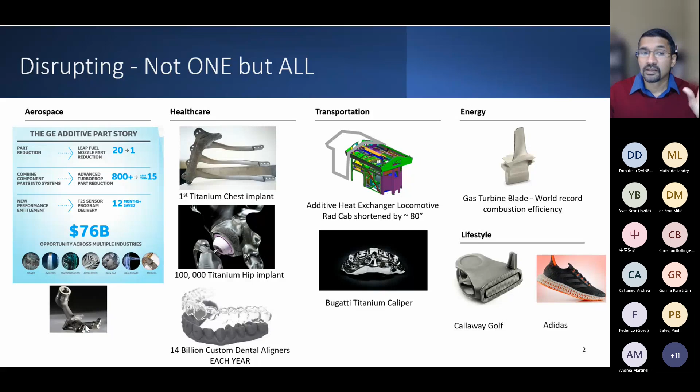The poster child when I was part of GE was the fuel nozzle, truly where it was a consolidation. This is in the hot section of the aircraft turbine, which disperses the fuel into the turbine, right? A 20 to 1 part consolidation that you can see, right? Single alloy manufactured using additive manufacturing.

The key part, as we think about penetration across multiple sectors: as we went through COVID, one of the key things we all heard about from our supply chain leaders was the challenges with supply chain resiliency. With that tailwind, where we were trying to see whether we can source products where we need to be, there's a clear conversation on a higher level about what onshoring means. And with those tailwinds, we'd expect more additive manufacturing to take place, because it has the capability to do in situ manufacturing, which is at point of use, whether it be in the dental segments that I highlighted.

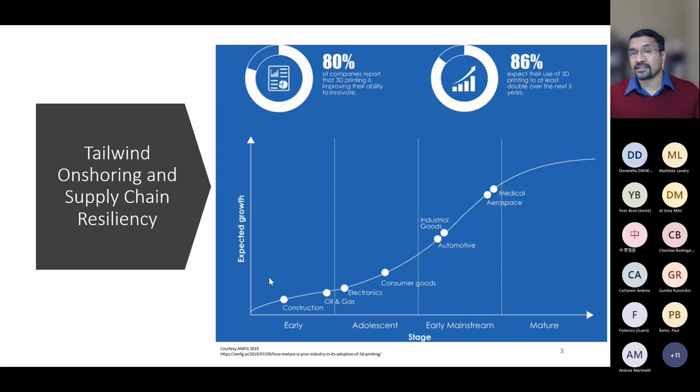With this, you'd expect more than an 86% doubling over the next 5 years, which is quite exciting to see and gives us as EHS professionals and OH professionals the ability to anticipate in the segment that you are in and to understand what the implications of this technology mean.

An aerospace example would be the clean sheet design of the Catalyst aircraft engine. A third of that entire engine was built with additively manufactured parts that were not the same as before, but were entirely designed for additive application.

If you look at Deloitte, they talk about the number of steps that go in when we think about sustainability, right? You're talking about not only your scope 1 and scope 2, but scope 3 being the largest part, where you're sourcing your materials from multiple suppliers. Additive has inherent capabilities for shrinking the supply chain, requiring fewer assembly steps, and, when you think about transport density, rather than the part needing to move, just the digital file needs to be sent to the right place and you can execute your job, right? So from a turnaround time standpoint, you have phenomenal capabilities with this technology.

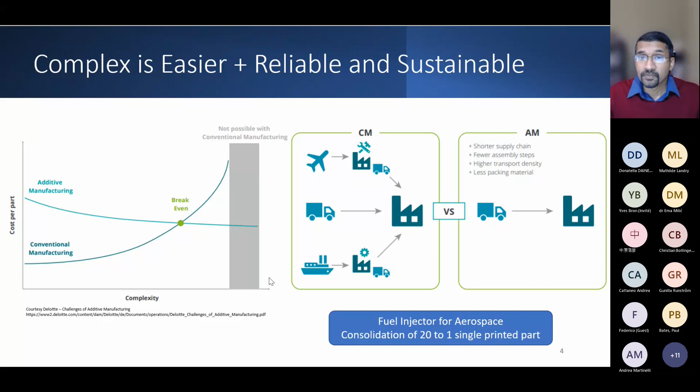So jumping in, just to kind of expand now, these numbers are notional in nature. When I first created this as part of the additive business unit, and I see the codec is not working. Let me see if I can go back.

Now, energy could be in multiple forms, whether it be an electron beam, laser, photocuring UV light, and it ends up creating the part in 3 dimensions as the plate lowers. So primarily, you're not subtracting, taking away a block of material using a lathe or a CNC machine and converting it into a part. You're just focusedly building the part.

And there are a couple of key material spaces that we'll highlight and touch upon today. One, when I think about mature technologies, metals primarily are being industrialized. In polymer, there's definitely quite a few custom manufacturing solutions. Take it from your iPhone case to a lockout device that we had seen built out specifically that we couldn't produce outside or procure, to polymers that are now more and more being used in things like washers, dryers, components that can enable your inventory to be significantly low.

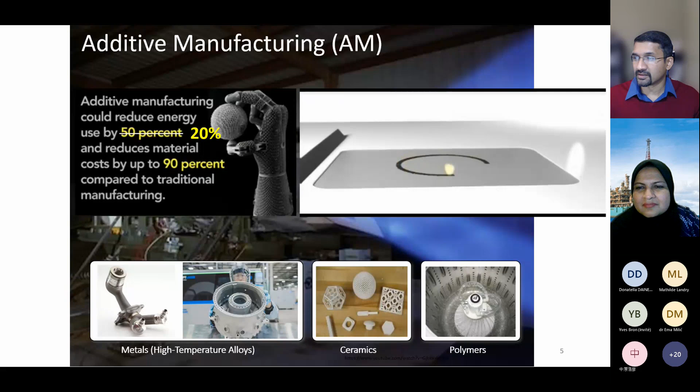Hey, Paul, Michael, glad to see you guys join.

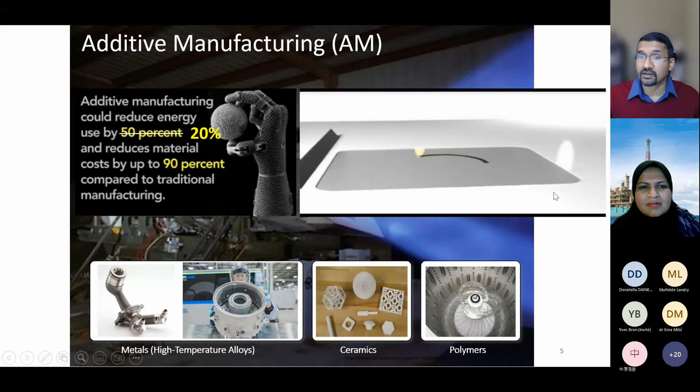All right, so we are seeing more of a theme for both. So I'll probably pick up my pace. That way we can get through the conversation, and feel free to raise your hand so we can answer any questions. So I'll jump in with metals, right? From an industrial manufacturing standpoint, the risk landscape is more diverse. So with any technology, there's quite a few acronyms.

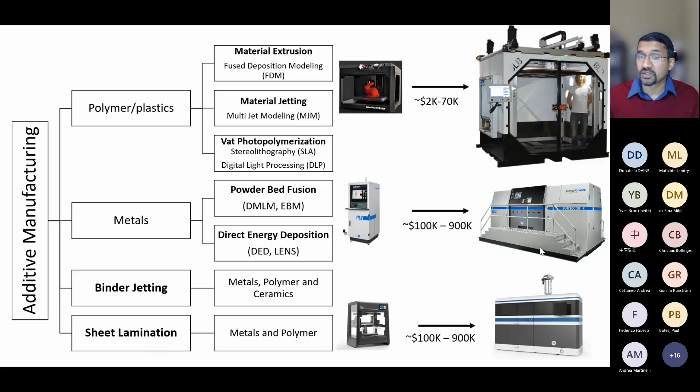And price points: when I think about literature, quite a bit of it has been focused on polymer, primarily because of the low cost of capital that's needed. But there's more work being done, specifically coming out of Sweden and Italy, that's quite exciting to see, focused on occupational health and hygiene issues when it comes to metal additive manufacturing.

Just to anchor our conversation, when we think about EHS risk management, this is one technology where it's important for us to think about not just the process, which we tend to focus on, but also the materials. Both of those two elements actually have a significant implication when it comes to deployment of metal additive manufacturing, as it impacts the infrastructure need, right?

So this is the building that you house it in, whether it be a brownfield or a greenfield site that you're trying to build up to bring this technology in. In small scale, you can get away with it, but if it's going to be industrialized, that is full scale production, or even low rate production, that warrants you to have that anticipation of risk and have the right conversation with your stakeholders up front.

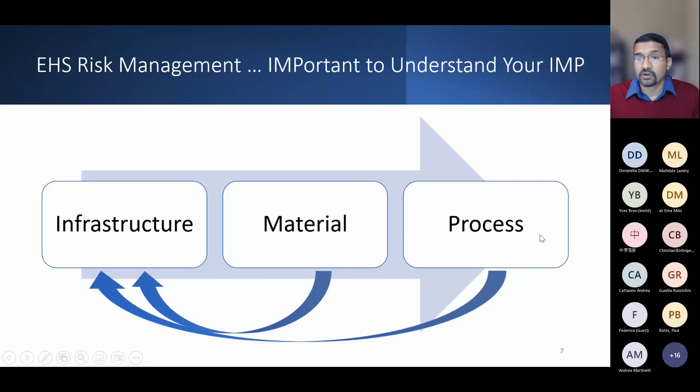So IMP, right? So important to know your IMP, which is infrastructure, material, and process. So we'll start with process and work our way backwards to what those implications mean when it comes to infrastructure needs. And we'll cover the controls for each technology space. So getting into metals, the most ubiquitous or commonly used technology when it comes to metal additive manufacturing is direct metal laser sintering and electron beam.

Effectively, in this case, as you saw on the prior slide, a platen, which is effectively a build plate where you apply powder layer by layer, and use of either a laser or an electron beam that supplies energy and then effectively sinters the metal powder in place. Now, this allows the part formation in 3 dimensions. The plate lowers, and you will have the part creation actually happening within, enclosed with the powder around it.

The difference between the two technologies, between DMLM and EBM: DMLM is actually done with inert gas. So I would ask you to think about it effectively like doing welding, right? Layer by layer, if you have ever welded, put a bead on, but you are doing that in an inert environment. So there are fume emissions that come out. The inert gas is actually recirculated to make sure you're capturing and reusing that from a utility perspective.

And if you think about the fire triangle, right? So you have metal powder, which depending on the size fraction can be combustible. The fuel aspect of it, oxygen, and the energy source, right? The control here from a risk standpoint is actually ensuring your oxygen is completely devoid, right? So it's absent in the environment the work is actually happening in, because the energy is coming from either laser or EBM. So the risk mitigation, primarily by inerting, is an approach that makes this technology safe from an execution perspective.

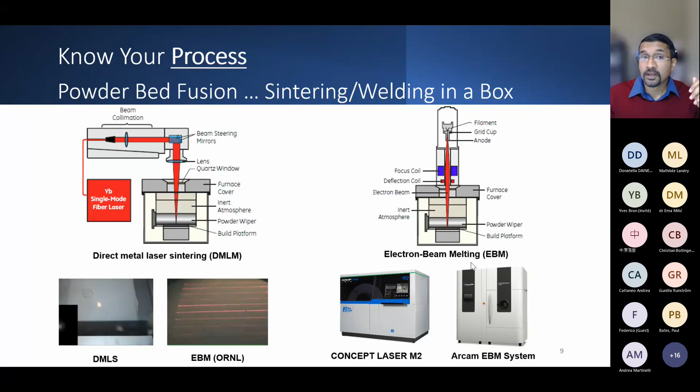You're thinking about companies like SLM, GE Additive, Desktop Metal. Well, Desktop is in the binder jetting space, that are actually bringing this technology into the marketplace at this point in time. Let's talk about binder jetting. One of the benefits and the trade-offs when it comes to powder bed fusion versus binder jetting.

In this case, binder jetting, I'd like you to think about it more like effectively baking a cake, right? So here you do have screen printing technology being used, where the powder bed is supplied and sprayed with fine nozzles, a polymeric or organic or water-based binder that's sprayed in the pattern of the part you want to create. As the head rolls over, it glues and creates a green part, which is then subsequently cured in the return step using curing light.

The subsequent motion of this, the build plate descends, and the green part is bonded as the platen comes down. If you can imagine something that you're making like a sandcastle, it is very fragile in nature.

The couple of key steps that are required to sinter it and make it into a fully densified part is you bring it subsequently to a curing and a sintering furnace, curing to drive off the organic binders or water-based binders that you're using, and then final densification is usually with sintering, right? So you have more than one set of process steps that need to happen.

Last but not least, depending on the porosity, if you need a densified part, infiltration, which is using materials to actually seal micro openings. Those are very common examples of what you would see in binder jet. I briefly talked about the benefits and the trade-offs earlier. Binder jet is one technology in metal additive manufacturing that is capable of high volume production. Think automotive application spaces where you can create the same part reliably with the specs that you want. And this technology is maturing quickly and has the ability to scale to full-scale deployment.

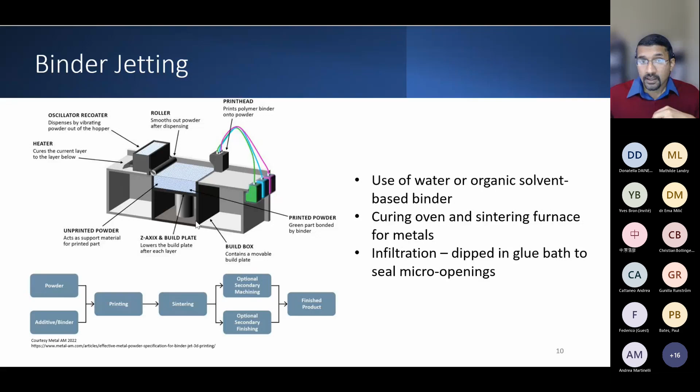The last but not least, directed energy deposition. If I simply put it, it's welding in an even larger box, right? So you have a version where you're working with metal powders, which are pushed through a jet with actuated nozzles, or it could be a wire, primarily in repair application spaces where you may have a high temperature component and you want to do field repairs. There are some pretty cool applications of creating larger aerospace parts, specifically in applications like SpaceX is thinking about. But feedstock material varies.

Just from a design perspective, you can see the operator is out of the weld pool envelope, right? As you see in the size and scale, these are massive systems, capable of achieving deposition rates significantly higher than binder jet or, for that matter, powder bed fusion systems. Those are a few elements that make this more suitable primarily for large part and repair applications. I'll take a pause.

Maybe I'll open the floor for the team if folks have any questions on the technology itself before we jump into specific elements. Does anybody have any questions? You can unmute yourself and ask a question to Srinivas.

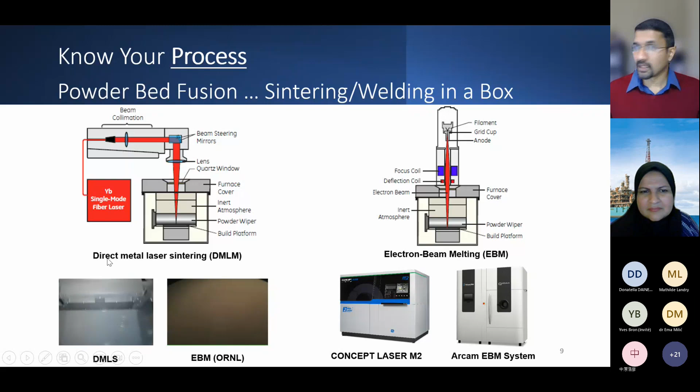High temperature metal alloys using DMLM, right? Yeah. So if you're thinking aerospace parts, in some cases you'd see low volume production being made with DMLM, like the Bugatti caliper that we talked about. And then high volume production is primarily through binder jet, which is now being matured as a technology. Also for the medical industry? Medical, no. Binder jetting hasn't seen the application yet. Binder jetting is in automotive. Automotive. Okay. Yep.

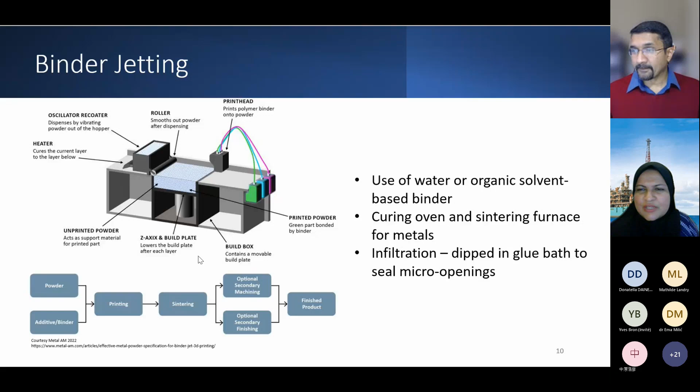Okay. Good question. Anyone? Does anyone have any feedback on this? Okay, maybe it's still in the process of absorbing. Yeah, you can go on.

Before you proceed, Srinivas, I would like to apologize. I need to take leave. I've informed Rita earlier. It's 9:10 here. I need to make a move, and I'll catch up with the recordings later. So once again, thank you so much, and have a good session. Thank you, Lina. All right. Okay, Rita, you can take over. Thank you very much. Thanks, Lina.

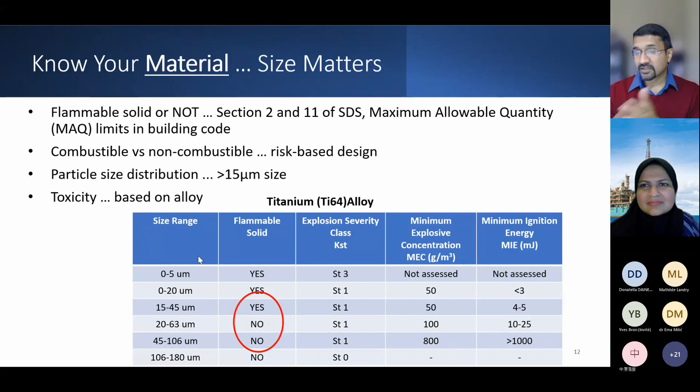So thinking about process, then the M, the material part, right? In this case, the size does matter. What I mean by that: as I highlighted, this is using metal powders. The toxicity, I think the community here on the call understands. The risk will depend on the type of metal alloy you're working with. Rarely do we see applications that are pure metal with a single element. It's cobalt chrome, Inconel, stainless steel in different versions, aluminum, magnesium, silicon. They're all applications that exist.

But I wanted to highlight why size. Specifically coming out of the US, there's been quite a bit of emphasis on combustible dust risk management. Metal alloy powders are a good example where, when it comes to metal additive manufacturing, the size of the material has a significant impact on its combustible dust properties.

What you're seeing here on the table, 15 to 45 micron, is the more common size fraction that is actually used for metal powder printing using DMLM technique. This is by definition and testing a flammable solid of class ST1, so you're thinking sugar, but with a significantly low minimum ignition energy, right? 4 to 5. Now, below 15, you're talking about risk differentiation when it comes to static ignition risk, right?

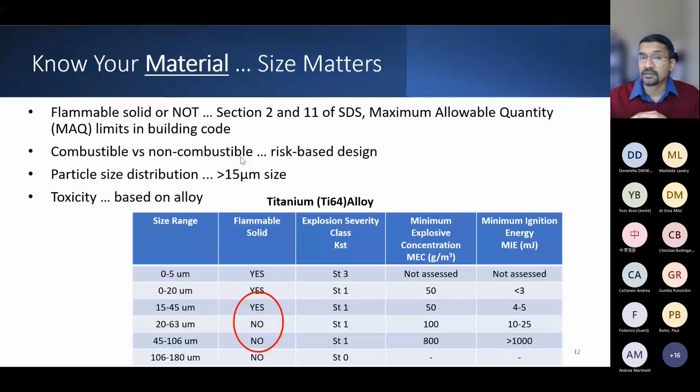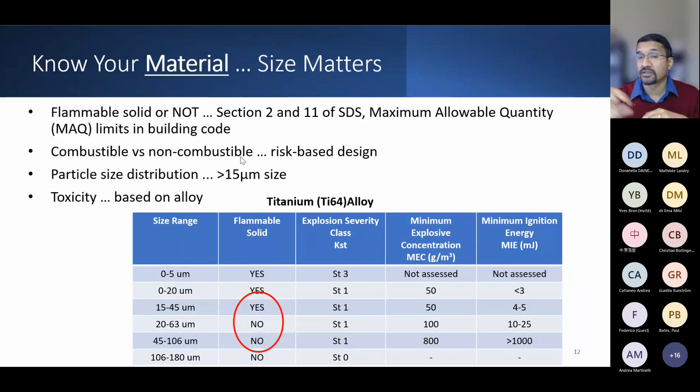So the smaller size fractions are taken out by design to make sure you are getting the optimal product particle size distribution. So not necessarily by design by any stretch in the nano space, which there's quite a bit of conversation and early concerns as the business was coming forward and we were building this out. Is like, do we understand that piece? However, there is welding happening, and I'll touch upon in the OH segment, what does it create and how does that impact the risk profile for the material?

The last piece, as we kind of think about printers, I talked about the build phase, and this is an example of a sample workflow. There are a couple of key steps, both pre and post, that we need to be mindful of to understand the technology implications. And this kind of highlights this for a laser powder bed fusion system. When you think about the printer for, in this case, the powder bed fusion DMLM system, powder loading in the smaller format system is still by hand.

You may be getting containers that are yay big that you are transferring, bringing them inside and pouring it out. I had seen early on the practice of scooping and filling in the build volume chambers, and the larger format systems are actually now self-conveying. So powder loading, depending how it's done, can have occupational health hygiene issues. The build phase itself, where you're supplying energy and keeping inert gas or vacuum, is relatively benign from a risk management perspective.

The units are actually tested for radiation, right? The Arcam system, because they have to be CE certified before they are supplied to the customer. But then when you think about the part as it is being removed, coming out of the machine, there is a depowdering step to some degree that you do, but the build plate is quite heavy, which is typically a metal plate on which the part is actually adhered or built in space.

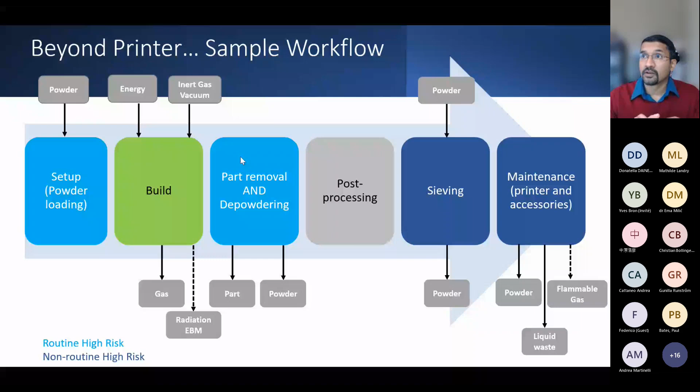So removing that part, depending on the large format printer that I showed, actually requires a crane to lift out the build plate and bring it to the right post-processing step and depowdering. Now, this is one place where I've seen risk not being completely visible, or people making, depending on the cost and the implication around it, choices that don't lend themselves to good risk management practices.

So specifically, if you are depowdering and you're not doing that in a classified system, which is electrically in the right classification, you increase the risk. Many of these applications use compressed air. So using a blast cabinet may not be your best option; think about classified systems that can actually mitigate that risk. The post-processing step after the powder is removed may require you to remove your supports and then do some final finishing activity. Depending how it's done in your industry, this may be something that is classically managed.

As we think about the powder that comes off, it is one of the materials that's a high value raw material input to the process. It's typically sieved 3 to 4 to 7 times to make sure you can continue reusing the powder as you add virgin powder to it. And that sieving in the R&D space, when I first saw it, was actually hand sieving, because they were trying to do small scale work.

In industry, there are actually now enclosed systems, not fully closed loop, but you add the powder in a bin. It goes through a vibrator sieve, could be inerted, in some cases not, and then you get the powder out. But this is one place where you have potential for a metal powder exposure. And last but not least, the first 5 boxes talk to routine, then the non-routine elements.

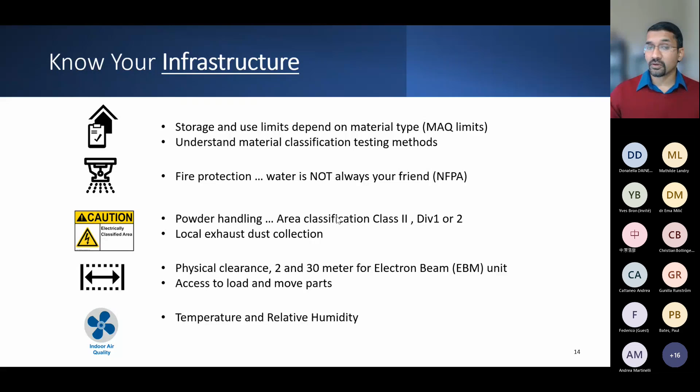Now, temperature and relative humidity can be an implication based on the material that you're working with, how hygroscopic, or what the quality team may need. That may also want you to keep that consideration in mind. So a couple of showstoppers that I've highlighted: during your assessment phase, you want to be thinking ahead and informing your facility engineering management teams on this topic.

So when you consolidate those points, this is one chart that kind of summarizes this. And I won't read through all of those elements. A few things upstream you've got to know, primarily on the safety side: understand your material, the combustible dust nature of it. Keep in mind the fire protection obligations that come with it. Make sure you're also thinking about the ergonomic aspects of doing this work, especially when you think about full rate production and how parts get moved around.

From a hygiene perspective, toxicity is driven by the metal alloy composition. A piece that may be for EBM, primarily in the US, because these are actually required to be registered in multiple jurisdictions within the US. So if you are using this technology, they have to be registered. So that's one part from a license and registration standpoint. You have to keep an eye out, knowing these are ionizing radiation generating units, right? So that's something that you've got to keep in mind.

Last but not least, on the environment side, depending on the scale of the work, if you are doing full scale production, hazardous air pollutants and the local agency may require some controls around it. A key determinant is the waste management aspect of it, knowing you're working with a potentially flammable waste stream, and if reuse or recycling of metal powder, how do you want to think about those elements? So those would be the couple of key points to keep in mind when it comes to EHS risk presented by metal additive manufacturing.

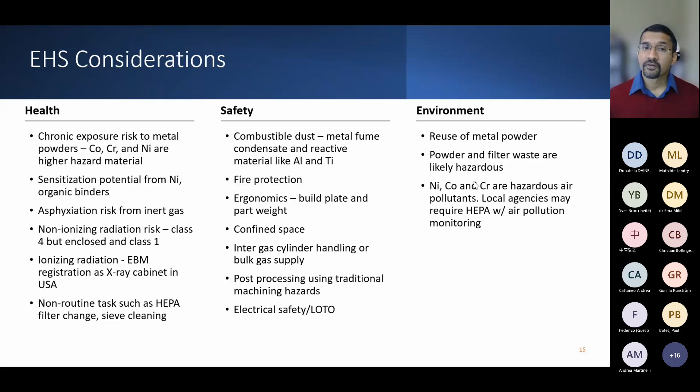Now that we have talked about different risks, I'd just like to peel the onion quickly on exposure management specifically for our group. Just want to highlight, when we think about controls, the framework that IOHA talks about. When you are thinking about risk, percents of OEL are a good way for you to think about risk management practices. And keep that in mind as we think about specific data points.

I highlight some from the literature, some from the studies that I've seen published in my prior work. So specific to metal additive manufacturing, this is something I saw in my work in collaboration with NIOSH when I was with GE. And more and more published literature has come out in this space. When it comes to laser powder bed fusion, which is DMLM and EBM technologies, you are seeing quite a bit of publication on studies done in Sweden, in Italy, in the US, where routine work results in personal exposures exceeding the TLV by a significant amount.

The more recent study done by Bao et al. for direct energy deposition was actually an Inconel alloy. They also saw exceedances when it comes to nickel. Now, we all understand the sensitization risk with nickel. We understand the risk profile. A fascinating study done early on by Graf in 2016, knowing the metal powder is fine in nature, saw a particle concentration difference between ceiling and floor.

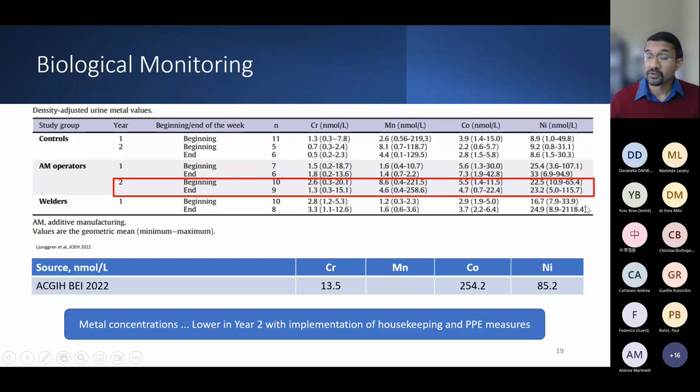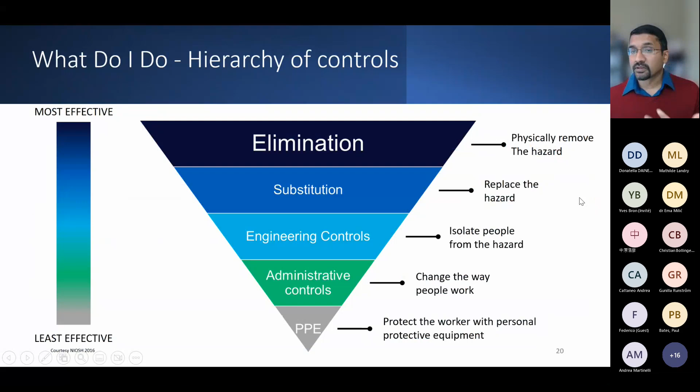And you can also see from a technology perspective, additive versus welding, right? The body burden is significantly higher when it comes to welding if you're not using the right controls compared to AM solutions. So knowing the risk profile, knowing the data, what can we do? I think we're all familiar with the hierarchy of controls. And in the next couple of slides, I'll highlight key user and equipment specific controls that'll give us a good feel for what things we need to be advocating for when you think about adoption of this technology.

When it comes to the machine itself, there are inherently designed controls that are important that every vendor is keeping in mind. Knowing these carry combustible dust risk, the loading door is interlocked, so you cannot open it when the laser or the EBM system is actually firing. Focused on mitigating the combustible dust risk, vacuum or dual oxygen sensors ensure the build envelope is inerted. I did highlight HEPA filtration, which is part of the design to ensure gas emissions from the build chamber are contained and captured.

In case of some of the systems, there's actually laser active leak detection, and then the shielding on the viewport, so you're not exposed to the UV radiation. And in cases of large format printers, like you see in an X-line system, the powder feed and the sieving is actually in a closed loop design where the powder is first added to the build chamber here, and that gets pneumatically conveyed and then recirculated back, right?

This is moving towards the norm of how large scale production needs to look, right? Minimizing touches to the powder, both from a safety perspective as well as from a product quality perspective. It mitigates both risks, and I see manufacturers and OEMs moving towards this. But then there are specific user controls which tend to be presented by OEMs as optional. And here's where, in my experience, we saw the biggest challenges and where the risk starts creeping in.

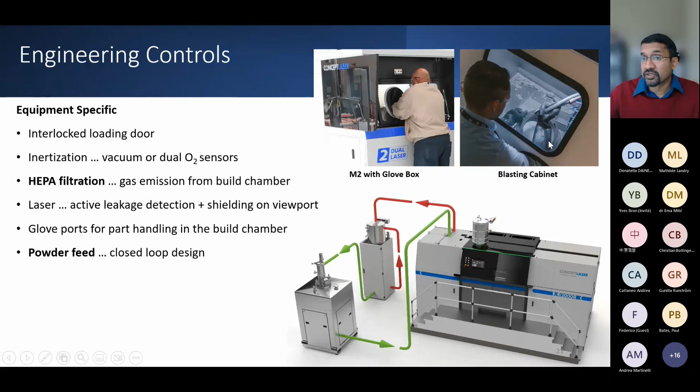Depowdering is a good example. Here you see an example of a blast cabinet. Now, this may be acceptable when you're doing it with a non-combustible dust material like an EBM or a material that has a very high minimum ignition energy. But we were working with materials that were flammable solids. And I'd say close to 2019, 2020, Solukon came up with an explosion-proof depowdering station. Phenomenal solution, definitely capital intensive, but it met the performance needs and the requirements that we had from both a safety and quality perspective. That is becoming more of an industry norm and a solution you can go after.

Sieving, powder and part movement, those are a couple of things, and I highlighted two examples. Automation is going to be a key way to solve for this problem. General Electric provides you a suite of solutions, whether it be the powder recovery system, parts being moved, a station that allows you to go to the PRS to actually sieve it. Or you're talking about Volkmann, which is another solid user. This is an example of a BMW line doing end-to-end using AGVs, automated guided vehicles like you see in Amazon warehousing, that can transport your parts, which are quite heavy, take them from the printer, move them to a powder recovery system, and then into the final stages, right?

So to get to that final end stage, this is one space where I see ergonomic risk, with full automation being the solution that industry is moving towards. But you may have to ensure that as you think about adoption, you don't lose sight of things like these trolleys and the PRS system that allow you to mitigate risk.

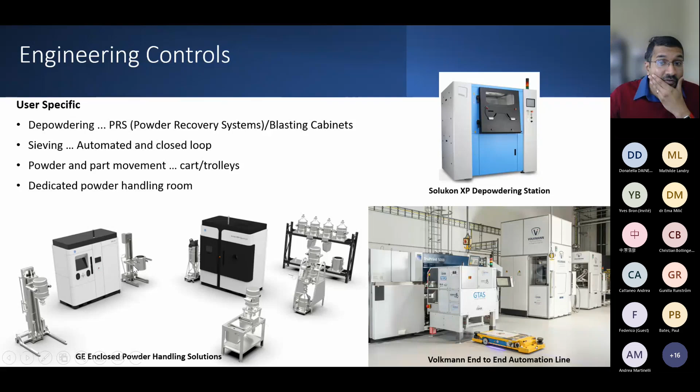And then you have a couple of key other controls that I wanted to highlight when it comes to fire protection. Grounding and bonding. One piece that there is actually an OSHA citation for is to prevent use of unclassified vacuum cleaners. So it was a requirement to have Class 2 vacuum cleaners, whether it be a wet or dry system. I did highlight water not being a friend.

Class D fire extinguishers are relevant for metals, but one which we found helpful in our large powder production facility was an F500 encapsulating foam. This is specifically capable of quickly reducing the temperatures of the fire and isolating and preventing oxygen from getting in, which upon dispensing reduces the fire potential. This was in large-scale powder production systems that we had up in Montreal. That was one application that we were trying to get field tested to make sure the deployment can be done at scale in our other facilities.

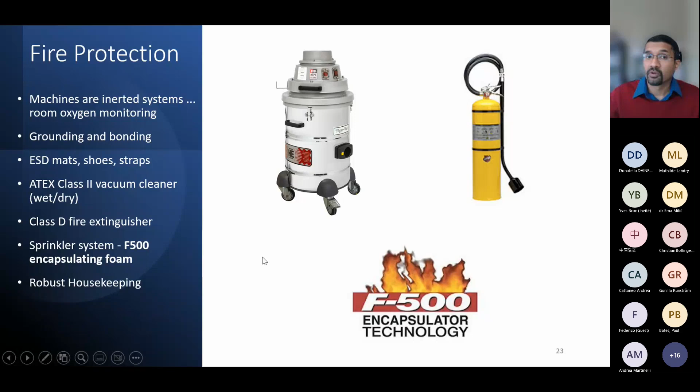And last but not least, when you're thinking combustible dust, as I've highlighted from both an occupational and combustible dust risk, is housekeeping. So keeping those key things in mind is a key element when you think about deployment. With admin controls, key probably closer to this group would be around MOC and the chemical approval program, making sure we understand the property of materials coming in, making sure you are doing routine PPE and housekeeping audits as part of your 5S program to ensure it's both clean and the PPE is effectively being used.

I'm sure from an occupational hygiene perspective, depending on where you guys stand, monitoring of these with aerosol monitors is a great way to get a feel for which tasks present the risk and think about educating when it comes to operator usage of PPE.

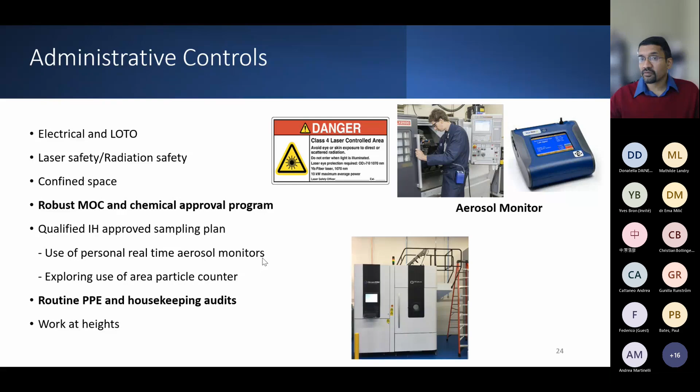And last but not least, an effective element of our risk management is PPE. So flame retardant coveralls were required in the large powder production facility. We also required that of our operators when they were performing maintenance tasks. If they're not doing maintenance, it was FR lab coats. So that ensured, in case of a fire risk, we had the right protective gear. ESD shoes and respirators, depending on the application and the task being performed. PAPRs were definitely preferred, especially during the larger powder removal phase, and during both sieving and maintenance activities, just from a comfort perspective. So those would be, I'd say, highlighted solutions.

So when we think about the key lessons learned in case of metals, for infrastructure, it's ensuring that you understand your building classification, think about both the fire rating for the building and the sprinkler, and have that active conversation upstream as you think about technology being brought in, because it becomes quite expensive to retrofit a building with the right requirements. With material, the characteristic of whether it's flammable or water reactive, ensuring you have the right data to have the right conversation. And a key part with metal powders: they are micron size, not nano. So even though you have nano satellites adhered to them, you do have to think about the reactivity of the material you're working with and manage that effectively.

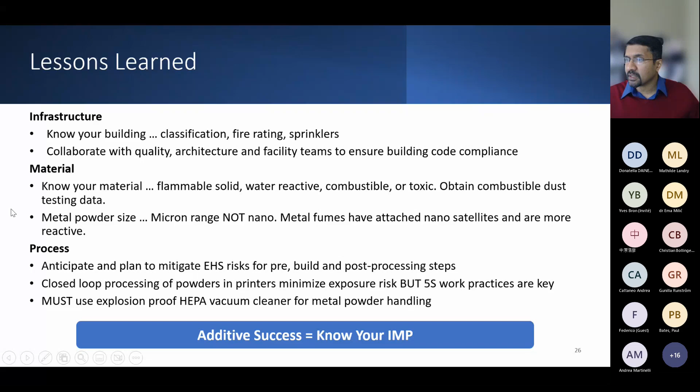So Bina has: what are the touch points for humans if processing is closed? So here's where I'd say, Bina, this slide talks to it. The printer itself has human touch points during powder loading and then part unloading. The build phase is completely enclosed, but you're also doing sieving and maintenance activity that requires human interaction. Now, the fully automated setup is in large-scale production, and an organization will take time to mature to that end state. So a lot of that typically tends to be manual, with human labor involved.

But if you go down the automated route, you may minimize those exposure steps. Where you cannot get away with it is maintenance activity. This very much requires human interaction. So hopefully that answers your question when it comes to metal powders and both DMLM and the technology portfolio. Is it possible to obtain health statistical data on specific exposure of the worker?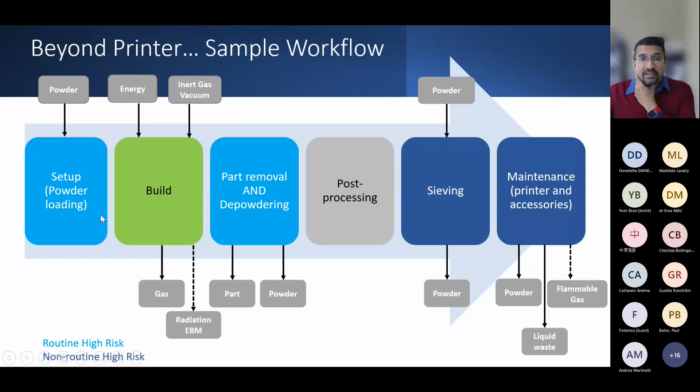Now it's clear. I mean, it depends on the metal or other materials. I mean, I ask TLV, TWA. So it depends on the activity and on what is the specific material you use. Yep. No, fair point. If I'm hearing and understanding what you said, right? So the studies refer to the raw materials they work with, right? So it could be Inconel, which has nickel and cobalt. So this is just the literature.

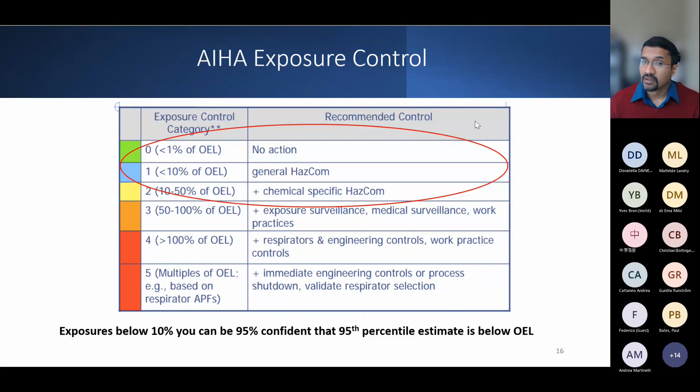What I encourage folks to think about is not just the action limit. Where do we feel there is good, robust statistical evidence that we have managed the exposures well, right? At 50%, you're still having the probability that you may have exceedance risk, depending on how many data points you have. So a target would be, can you bring it down to less than 10%, right? So in this case, we do see quite a few data sets that talk to exposures exceeding 100%. Right. So focusing on those tasks with real-time aerosol monitors would be a great way to isolate tasks, and then you can focus your exposure mitigation on that specific step. Oh, all right. Thank you. Yep.

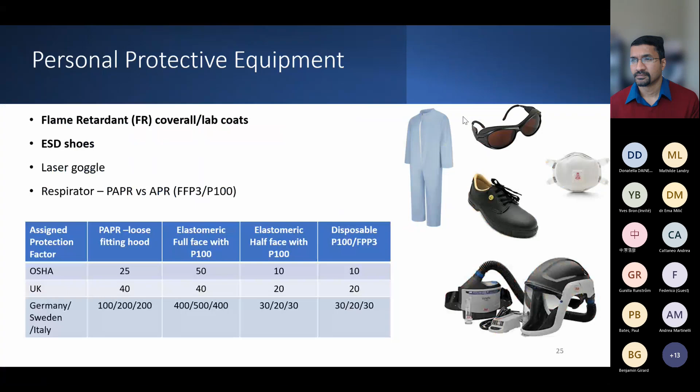All right, sounds good. We'll just roll into it.

So polymers. Now there is a wealth of evidence in this space, knowing the capital cost is much easier to acquire. It definitely went through its own Gartner hype cycle earlier than metal additive manufacturing, which is kind of feeling the same challenge, trying to get up from the trough and say, hey, can we scale and make parts? So there is quite a bit of literature and concern, primarily driven by exposure chamber studies, and we'll touch upon some of this data.

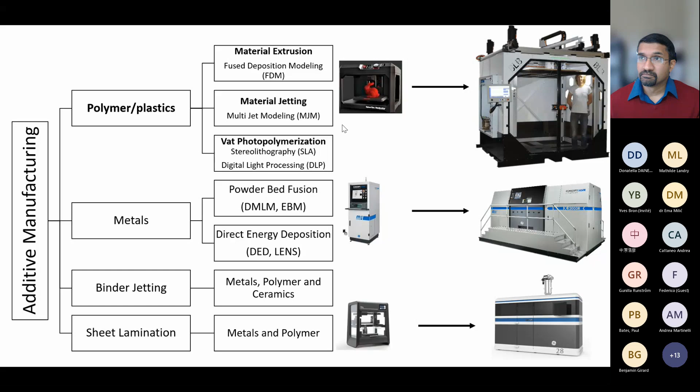The three key processes, right? So again, the process types are material extrusion, which is the small format FDM printers that you're seeing; material jetting, which is, again, a version of, I'd say, inkjet printing; and then VAT photopolymerization, which we'll touch upon.

So on the process side, material extrusion: in this case, it's a solid filament that is heated through a nozzle, and the plate moves in an X, Y, and Z envelope, where the heated filament is deposited in the 3D pattern. Common materials that have been studied quite a bit are ABS, acrylonitrile butadiene styrene, and polylactic acid, but some of the new materials are polycarbonate and Ultem.

You've seen the small format printers, but if you're working with larger systems, they may even use materials like Kevlar or things that may contain embedded nanomaterials. I did not see that in industry applications, but there may be some unique application spaces where that may be the case. Because you're creating a material, it also has support structures, like metal, which then need to be removed.

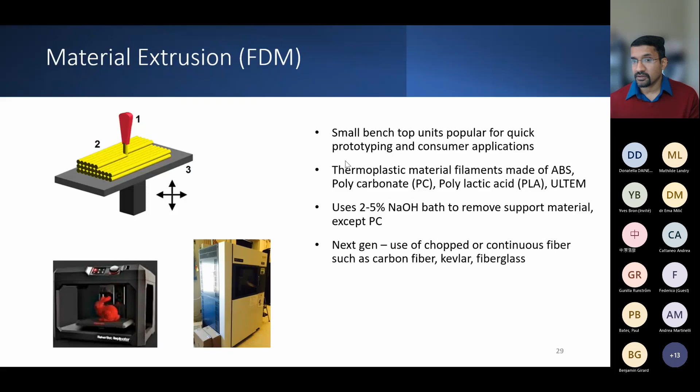So it's not uncommon to have a small weight percent of caustic material being used to remove the support material, which ends up making the final net shape product that you can easily handle. Right, so that's a common piece for material extrusion technology. And I highlighted the need for continuous fiber, Kevlar and fiberglass being some of them.

That's more on the smaller consumer application space. When I think industrial, it's both material jetting and VAT polymerization. This is actually designed well from an industrial use perspective. It's a two-part material, typically a photopolymer and wax, which is provided to you in two distinct darker colored jars. Think of milk jugs that get dispensed right into the system. You just place it, the system connects, and then the material is dispensed from a printer head. They call it a jetting head, which sprays it onto the build plate.

It's very similar to how binder jetting works, but you don't have the powder bed at the bottom on which the binder is placed. As the material comes out, the layer itself creates the part, which is subsequently cured with UV light. All of this in an industrial system has the controls. It's a completely enclosed system. What we did observe for material jetting early on is there were no active exhaust systems in place, right? So they vented into the room, which was a challenge from an implementation and risk perspective when it comes to volatile organic compounds, or VOCs.

As the part gets made, because it has both the photopolymer and wax, UV light cures the polymer part. The excess wax then needs to be removed. So the part is either heated in an oven or submerged in molten wax to remove the excess wax connected to the part.

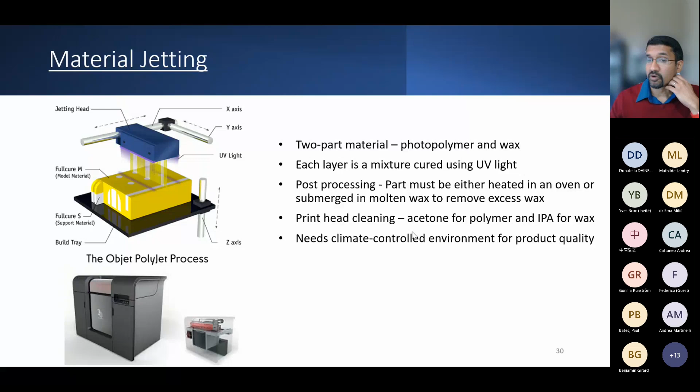A common need that we saw was also a climate controlled environment for product quality, for both material jetting as well as VAT photopolymerization, which is the next industrial technique. So VAT polymerization is one of the larger, primary cool application spaces I see. I highlighted the 3D printed shoe by Adidas and a couple other manufacturers where the sole is designed.

In this case, the energy source is sent through the collimator onto where the entire vat or container is filled with photopolymer resin. It does not have the wax, but you effectively pour it in. It definitely creates an odor, right? So from an indoor air quality or environmental quality perspective, odor concerns are quite common with both technologies, more so for VAT polymerization. The solid state laser is used to cure each layer as the build plate descends. So there's a fine layer that cures as the plate comes down, and it keeps repeating the process.

Post-processing in this case is again caustic, and the part itself has a final cure step, which is put in a UV box to fully harden, enclosed, not necessarily from a risk standpoint a high-risk task. And need for climate control is key because you're working with open vat systems. We did some initial monitoring both indoor and outside.

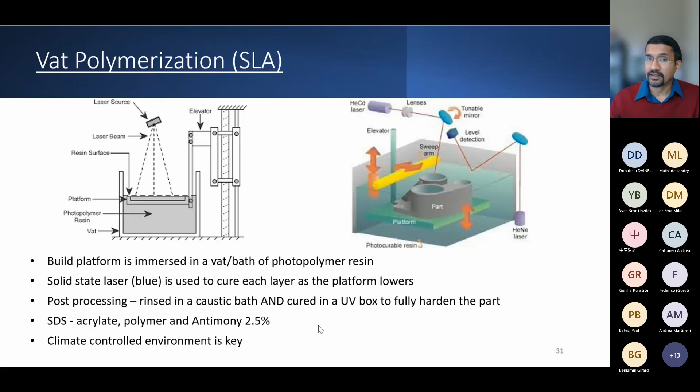The SDS, which I'll touch upon, kind of talks to what the exposure risk would be. In this case, SDS material, as I talk about, knowing your material, common ones that we saw had epoxy, acrylates, which were known as both dermal and skin sensitizers. But if you think about the molecular nature of the materials highlighted here, they're high molecular weight compounds. So the higher the molecular weight, they tend to be non-volatile at room temperature.

Neither of these processes are heated processes, so you're not driving off VOCs. They are in a climate-controlled environment to get good product quality. But the thing you need to be aware of, which many of us know, acrylates and epoxies are sensitizers in nature. So how do you think about the right PPE controls, making sure glove usage is more diligent as they are handling both the raw material and the cured product. Cured product typically does not have a similar risk profile.

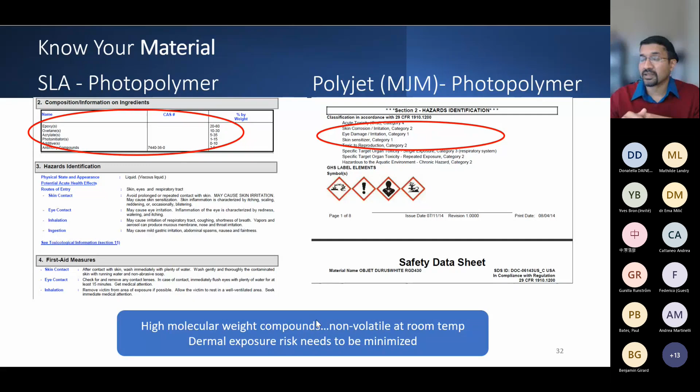Antimony in this case is something we saw in smaller quantities, and an example of something in an SDS that, from an exposure risk perspective, wasn't present in any of the sampling studies that were done in my prior role.

Knowing this, you may be wondering, so I touched upon the liquid side of it, but if you are adopting this technology, you're thinking about, well, what is in the FDM, the fused deposition fume? So it's the heated filament. And work that was done by Davis in 2017 really does a good job of showing you the distribution of materials in the fumes that may be coming off.

Just from the SDS, styrene and formaldehyde are two common examples. Acrylates and acetaldehyde are ones you can see across the different material types that you're working with. Things like aldehydes are known to be carcinogenic, so you have to be mindful of it. Acrylates are sensitizers. The key part, if you think on the material chemistry side, heated, how much of the fume comes off, and what does it mean from a risk standpoint?

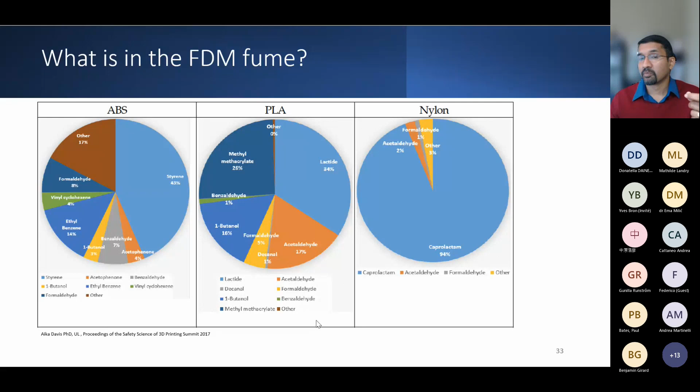And there was quite a bit of excitement in the early literature, which talked to, hey, we are able to measure the particle concentration that was coming off. Nano was big, almost 5 to 7 years back. There was quite a bit of measurement technology out there. But the question I was trying to answer from an implementation standpoint: are these fumes presenting health risk? You are seeing particle counts because you can measure for it, but what does it translate to from an exposure risk management standpoint?

So I wanted to highlight one. I used to have a table in my prior slides, which I had to pull together. Stefaniak from NIOSH has done a phenomenal job in his 2021 publication in the Journal of Toxicology and Environmental Health, which talks to exposure to both gas and particulate emissions from multiple technology types all the way up to 2020. And this is just one of the tables, just to give you a feel for it. I think he's got 10 tables in there that talk to the different exposure profiles.

A lot of the studies talked about measuring for acetaldehyde. You're looking at formaldehyde. You're looking at styrene. These are all being measured in micrograms per cubic meter, which is the airborne concentration measured in work environments. Now, to anchor this, these are not in milligrams, but in micrograms.

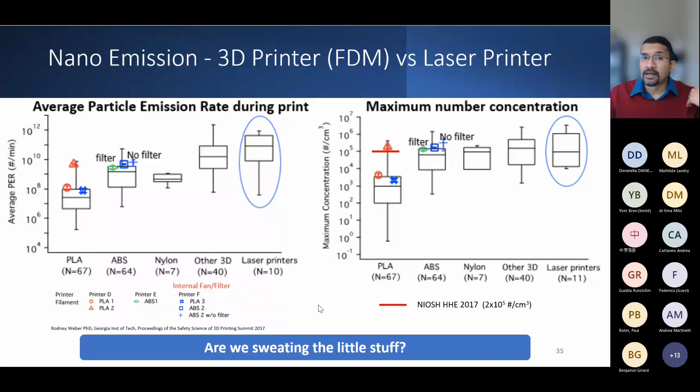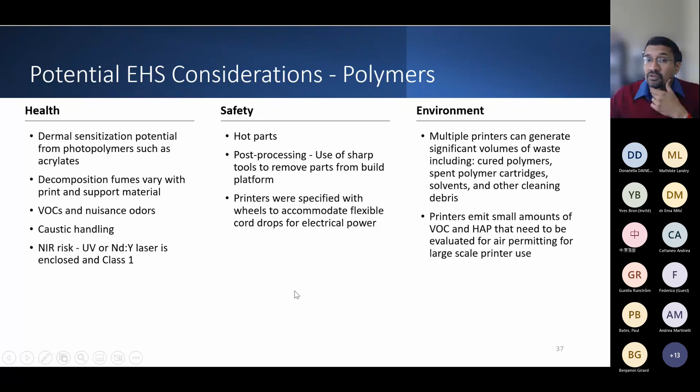And from an emissions perspective, the key challenges where I think risk starts to get higher is if you are talking about large scale format with multiple printers, right? How do you think about your waste management? So far from an environmental regulation perspective, the VOC emission from industrialized systems are not much that warrants any emission controls in the US. But that's something that we were always mindful of and keeping ourselves in check when we think about environmental risk.

So what are some controls similar to metals? Few that are equipment specific, right? So loading door and UV systems are interlocked. For PolyJet or material jet, it's the canister style system, so it reduces dermal exposure. The vendors are thinking about it. But then few that I think are worth thinking about, especially for large scale printing, is user specific controls.

Your 1, 2, 3 printers in a large office, not an issue. But we had a bank of 25 printers. They came, as you can see on the object on the left, with I'd say no better than a MERV 10 filter system that was part of the printer, and that just went right in. You could smell the odors. We knew over time there would be concerns.

So we actually designed and installed our own ventilation duct, which was connected to a singular system that passively captured the fumes and then discharged it outside, right? So the positive pressure from the system was enough to carry it and take it out. So not a significant investment. Here's an example of how BMW is doing it when it comes to their deployment with printers. They have designed and installed a duct system to just take away the fumes.

NIOSH did a study in 2019, and they did it with what I recall like 20 plus systems. And one of the recommendations was if you are doing large scale, even consumer style printing, like in a makerspace, installing these is one easy way to mitigate the indoor air quality issues that you may be thinking about, right? So think number of systems and then start thinking about potentially ventilation controls that mitigate that risk.

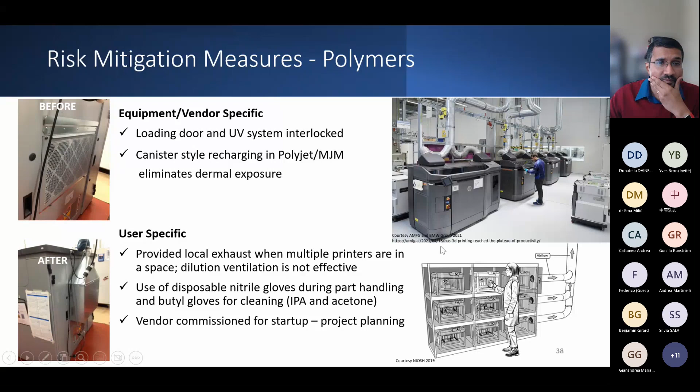So key lessons from my standpoint, and I think literature points to it and kind of validates some of my early experiences. The VOC concentrations that we see are significantly below established OELs. The excitement is around ultrafine particulate emissions that we can measure for, very similar to laser printer emissions, right? So when we think about, hey, what does that mean? Do keep both of those parameters in mind when it comes to talking about this risk to your stakeholders.

What I would recommend if you're scaling up the number of printers, not just think indoor air quality, I think it'll be prudent to actually provide local exhaust to mitigate that risk. And the part that is around photopolymer usage, sensitization, the gloves and the cleaning agents, it's something that we can absolutely manage. And do think about hand laceration. It's one I saw quite a few of, and we reacted to it, but it's one we can anticipate and put some good controls in place.

So that kind of summarizes, I'd say, key takeaways from polymers. I'd pause here, perhaps take questions from the team, and maybe just wrap it up with 1 or 2 slides on standards and where we are headed. So questions from the group. I believe we have line 15.

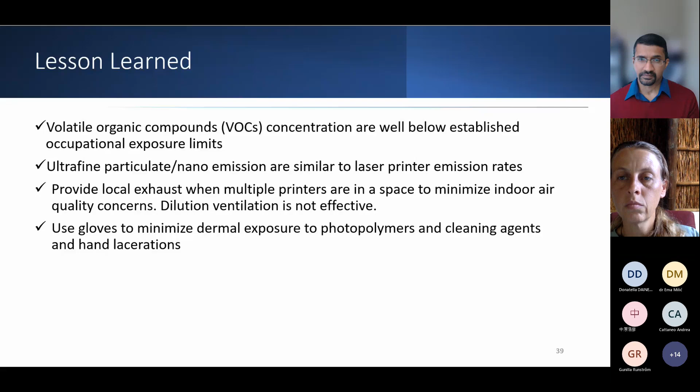The question is about emissions from polymers. For instance, formaldehyde. I was wondering if short-term peaks can be assumed and might possibly have health impacts on workers.

It's a good question. So the summaries that I personally went through, and then what's been presented by Alex Stefaniak from NIOSH, were time-weighted averages for full shift exposures, right? That's what I saw as data points. I don't recall specific short-term exposures for formaldehyde. So couldn't comment.

Typically, the profile for emissions, if you're looking just from a particulate standpoint, you would see during the build phase, the values from particle counts climb. So gas phase, I'd expect to be higher then it comes down. But I don't believe as the print job is going, there is episodic increase, right? You would see a gradual increase in your concentration, specifically if you're in an unventilated space. A single printer running FDM, I don't see that as an issue.

Thank you. Yep. And 50% OEL is a good threshold. Well, risk mitigation frameworks are, I'd say, both driven by your organization and sometimes jurisdictional specific. So what does the regulation call for? The action limit is a good starting point to keep in mind, right? In case of metals, we had exceedances. You're seeing it in literature, so do focus on it.

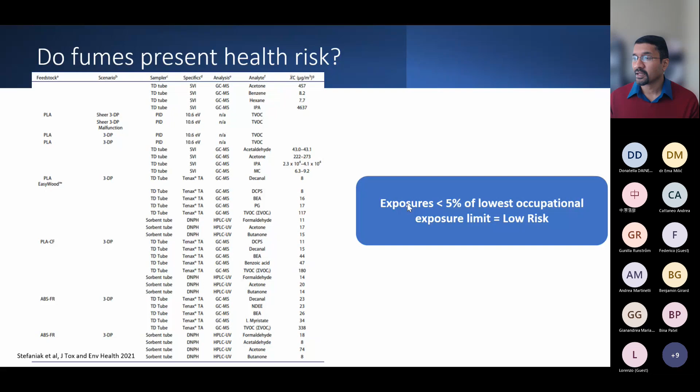So one of the biggest things that we look for in any new technology, right? We have a good feel of what welding means. Metal additive is nothing but sintering or welding in a box, but there are other aspects of exposure profiles you have to keep in mind. But there was a lot of excitement and energy in this space to say, hey, let's go build the framework out, both on the technology, quality standpoint, and safety.

As I went back and re-looked at it after being off for 2 years, it was interesting to observe ASTM has completely shut down their scope of work when it comes to EHS standards, and ISO TC261 is primarily the one that's focusing on bringing forward some safety specific standards, primarily focusing on material and the requirements for powder bed fusion. So these are the two spaces where there is no final standard, but it's under development. So that's something that you got to keep in mind.

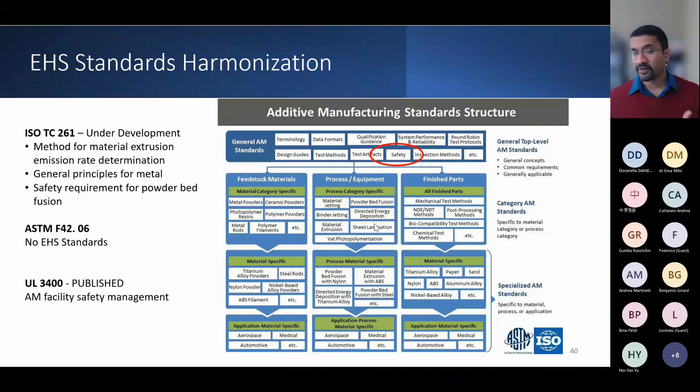UL actually has a published AM facility safety management standard. Paul, I know you are on the call, you could probably even comment on it. This is one that came to mind that talks to infrastructure risk. Now, again, not a requirement, but there is an anchoring on what things you must consider, and UL actually certifies your production facility as being AM adherent, if I may call it. There is no compliance behind it, but that's something for teams to keep in mind, right? So standards are coming; anticipate the risk, and deploy the controls that I've talked through in terms of the risk management framework.

And one piece, right? As we think about technology, the way it moves, construction is a big landscape. Just wanted to highlight it when you think of the future of work, right? You're talking about 3D printing, material efficiency, even in construction. In Austin, Texas, they are building out up to 300 houses, to give you an initial proof point. So it is one that's going to impact not just industrial manufacturing, in the way we see the world.

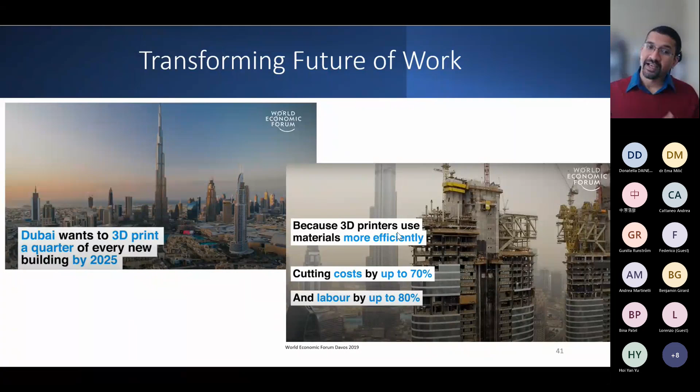And I wanted to close with this thought, right? As we think of technology, let's not check out our good EHS hat. It's not always around one dimension of risk, right? Classic example of LOTO: if you don't control, you don't close it off. Don't do what I do, right? Don't forget to unplug the oven or just leave your stove on. We may have some additional common risks that we have to be mindful of. So make sure you keep those in mind. And the holistic view is always helpful when it comes to managing this risk moving forward.

And if you are thinking about additive, just wanted to highlight a completely, fully 3D printed shoe, if you're thinking of a gift idea for one of your mates, or for family, or for yourself, right? Something hopefully for the holidays you can check out.